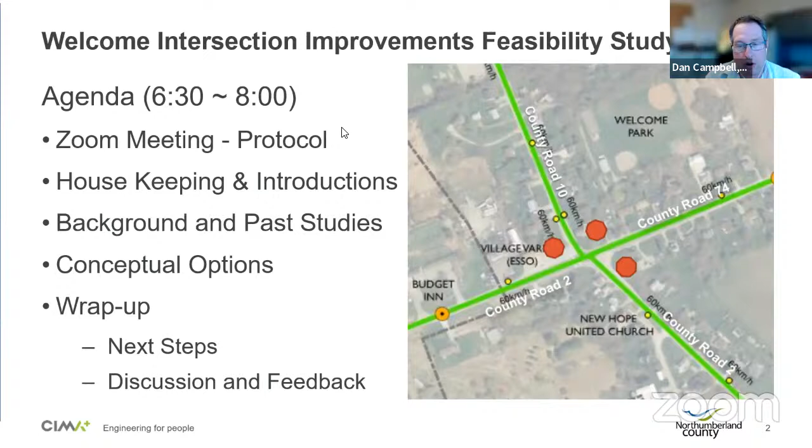So with that, we'll jump into the first portion of this evening, which is a presentation. As mentioned, the session's planned for 6:30 till 8 o'clock tonight. We've talked a little bit about the Zoom meeting protocols and some housekeeping already. I'll quickly roll into some introductions, then we'll move through background and past studies, discussion of the conceptual options, and then wrap up with some discussion of next steps and an opportunity for feedback. The presentation will probably take about half an hour to 40 minutes. We thank you for your time and patience, and hopefully there's some useful information along the way to help inform our conversation afterwards.

By way of introduction, on the call this evening there's myself, Dan Campbell. We have Denise Marshall, the Director of Public Works. I believe Brunilda Tenna, our project engineer working on this project, is also with us, along with some of our communications and corporate services team helping everything run smoothly. We also have Ron Albright from CIMA+. Ron is a project director with CIMA+ and has been the project manager for the work CIMA+ has done for the county on this project to help us develop and understand the various options.

Jumping right in, the project rationale - what's led us here. The intersection, as many people probably know, was originally part of MTO's road network, and it's evolved over the years, started as a two-way stop, became a three-way stop because of some of the sightline constraints to the east of the intersection along what used to be the old connecting link Highway 106, Dale Road now. That's what's led to that traffic control arrangement. There are also other challenges, including the grade coming up to the intersection from the west traveling eastbound, as well as the offset and skew between the south leg of County Road 2 and County Road 10, and a variety of other issues.

The size of the intersection is somewhat unique in that there are multiple lanes controlled by a stop sign, which is not typical, but not entirely uncommon.

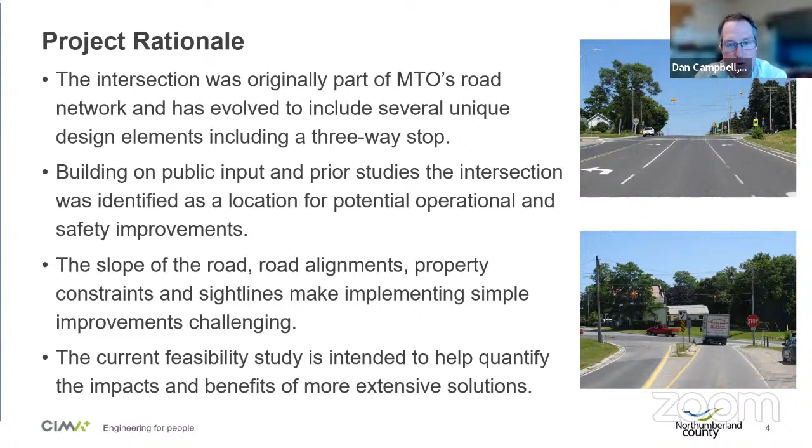So a bit of a recap of things we've probably already touched on, but the purpose of tonight's meeting is to share project background, present several possible options, outline what initially has been identified as the possible impacts and benefits of those options, and then receive feedback from those who have joined us tonight.

So the project process and timeline for the feasibility study we're in now: we've completed a background review and analysis, including listening to the comments and input we've received to date. We've developed some possible options, and we're here tonight as part of our public consultation process.

After we wrap this up, we'll incorporate the public feedback received tonight, as well as in the lead up to tonight, and use that to tweak and refine the options and how we understand their impacts.

Then we'll move forward in the summer to finalizing our feasibility study report. From there, we would look, pending budget approval and direction from council, to moving towards a detailed design for a preferred alternative.

Whatever that preferred alternative might be, construction would follow in 2024 or beyond, with all of that contingent on council approving the budget to move ahead with those activities.

Moving into a little more specific background, I want to touch on some of the previous public input the county has received over time, which has really come in three forms.

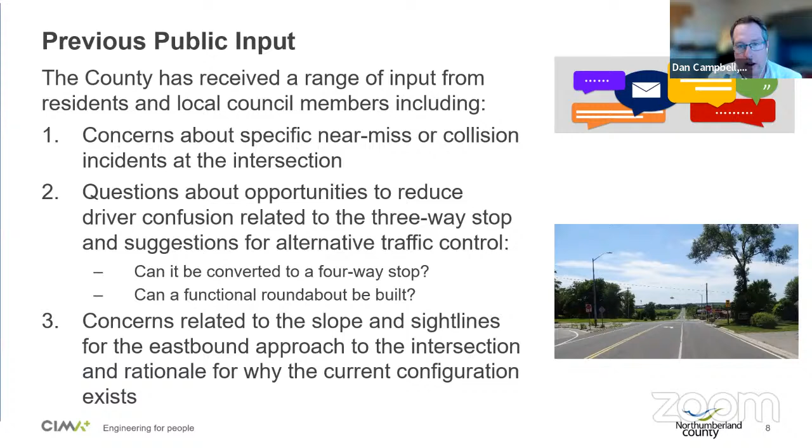It has led us to ask what we could feasibly do to possibly improve this, and that's why we're here tonight. Going back a little in time, in 2015 the county did a speed review in Welcome.

That review looked at collision history in Welcome. Between 2001 and 2014, there were 21 motor vehicle collisions of various nature within the Welcome area, on all of the roads leading into and through the hamlet.

Three of those collisions in that time period occurred at the intersection, or rather, three of those collisions were between 2010 and 2014, and one of them was at the intersection. All of those collisions were property damage only, fortunately.

Touching a little on speed from that study, the average operating speed was in the range of 70 to 77 kilometers an hour, with the 85th percentile speed...

85% of the traffic is doing at least 80 to 88 kilometers an hour, depending on where that was measured in the hamlet. So the study determined that the 60 kilometer an hour posted speed limit is appropriate, but driver compliance was found to be an issue.

There were recommendations for transition improvements to be implemented at the hamlet entry points to encourage compliance. That's been done and monitored, and the effectiveness of that is limited, something the county continues to monitor and work on solutions as we implement our speed management programs at various locations across the county.

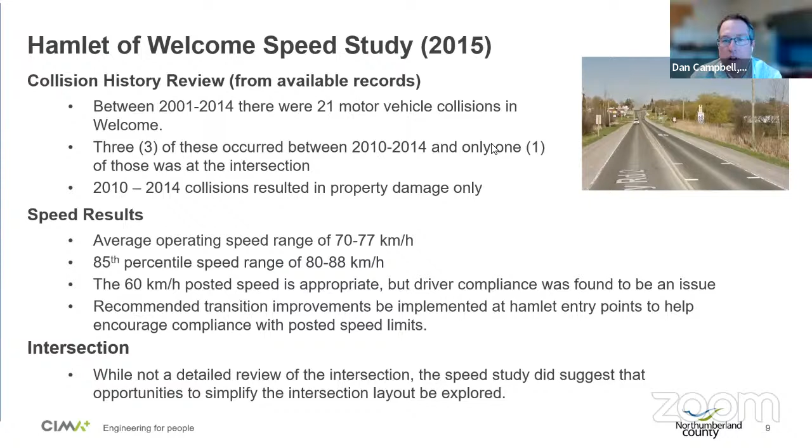Since 2015, the county, working with MTO and OPP to receive collision records, has continued to monitor collisions at and around the intersection. There have been 8 recorded collisions since 2015 up to 2020. 5 of those were within the intersection or on the stop controlled approaches to the intersection.

The 3 that are shown with the yellow dots were related to intersection operations and a failure of one vehicle to yield the right of way to another where required. So a function of how the traffic control is being obeyed or not obeyed.

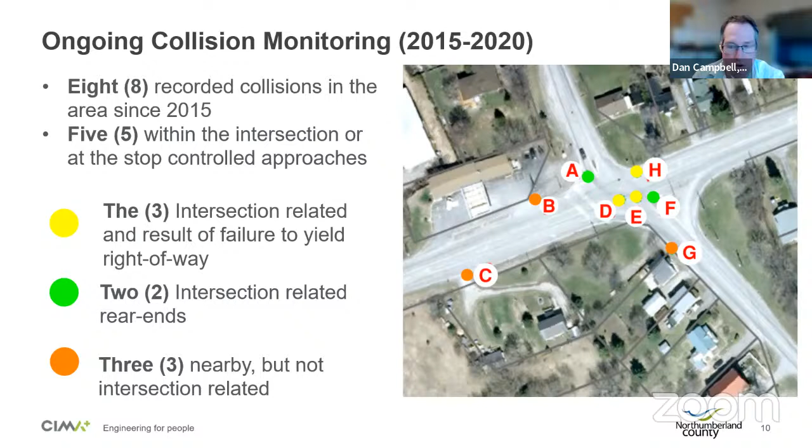2 of those, the green dots, were rear end incidents at the intersection where one vehicle stopped and another vehicle either failed to stop in time or just did not stop and ran into the rear end of the stopped vehicle. Then 3 that are around the intersection but were not related to the operation of the intersection itself. They're either single motor vehicle collisions or collisions involving an entrance to a driveway or commercial site.

Coming forward in time a little bit, in 2019 the county did an intersection conflict analysis. 1 week of video data was captured for the intersection, and the video was used to evaluate potential conflicts between traffic. The conflict analysis identifies situations where 2 vehicles come very close to occupying the same physical space at the exact same time.

In other words, basically a near miss. A collision didn't happen, but 2 vehicles came very close to colliding at the same point in time.

The diagram here illustrates the various movements at the intersection. A couple are removed for simplicity, but then the 7 different dots show individual conflict points between the various movements that were evaluated.

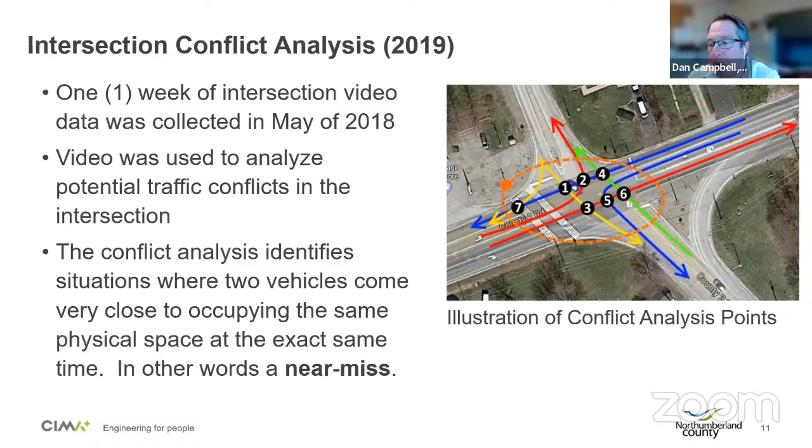Getting a little bit more technical, that analysis uses an approach called post-encroachment time, which looks at when one vehicle encroaches into the area that another vehicle has just left shortly before. The video data can be used to automatically identify vehicles and how far in space and time they were separated, and then allow that data to be digested and reviewed.

That 1 week of video data identified that there were no very high conflict PET values with less than 2 seconds observed. There were lots of moderate values of 3 to 5 seconds observed, and some high conflict values of 2 to 3 seconds.

When analyzing those values and combining them with the severity of a collision related to the potential conflict, the numerical data suggests that conflicts between the eastbound left turn crossing the westbound through movement and the eastbound through movement crossing the westbound left turn movement are potential risks, which I think probably comes as limited surprise to anybody.

That's the through movements with the left turn movements, one of those movements being the uncontrolled leg where traffic is not required to stop. The southbound right crossing the westbound through also cropped up because there's lots of vehicles that tend to accelerate quickly together through that section and be close together, although the severity of those potential collisions is lower than the others for sure.

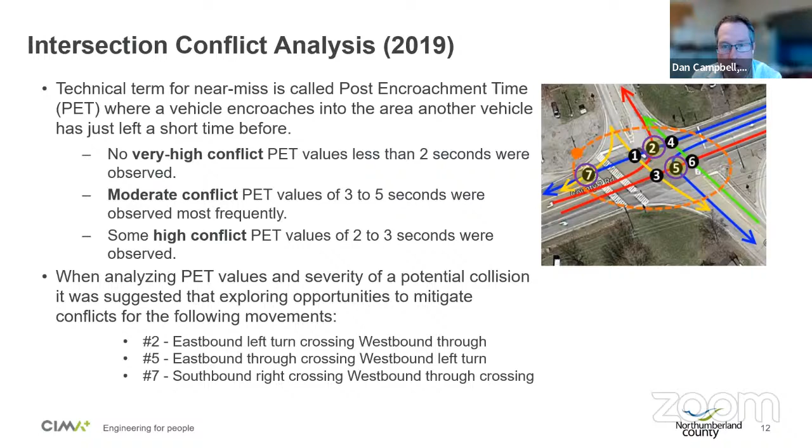So we're going to jump into conceptual options now. I'm just going to introduce some options, and then I'm going to turn it over to Ron to walk us through those options. We have 3 options we'd like to talk about tonight.

The first option is converting the intersection to a 4-way stop with full reconstruction of the intersection to create a flatter road profile to allow eastbound traffic to stop and restart. So we're going to talk about what that means and why it's necessary.

The second option is converting the intersection to a roundabout with related changes to road alignments and profiles. And we'll show a concept of how that could work, what the footprint of that is like in the community, and what some of the potential benefits and impacts of that are.

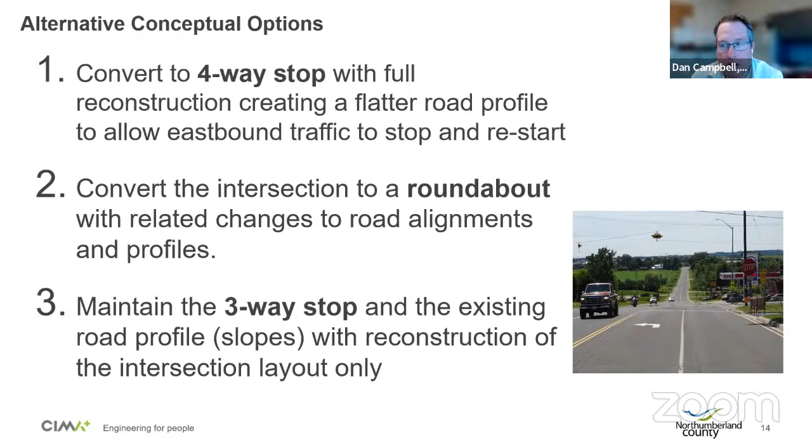And then finally, we'd like to also talk about an option where the three-way stop is maintained, the existing road profile of the slopes are maintained, and the intersection is reconstructed in its layout only, with just the lane configuration changed. To use an industry term, we put it on a road diet and squish the road in, reducing vehicular space, increasing space for other users, and simplifying the intersection to bring everything closer together. So with that, I'll turn it over to you, Ron. Thank you, Dan.

As part of our review, many design elements were considered when assessing the alternatives. First and foremost, safety for all users of the intersection, visibility for stopped vehicles, and being able to see left, right, and forward, making sure obstructions are not in these lines of sight.

The other sight line that is important to assess is being able to see oncoming vehicles when looking past a crest of a hill or looking through a vertical curve.

Potential property impacts as a result of design alternatives, operational impacts, or how users negotiate through the intersection, such as the time people are waiting to go through the intersection, the number of lanes required to provide an acceptable level of service for the intersection, and the steepness of the approaches. How changes will impact property owners accessing their property.

Impacts to such things as hydro lines, buried communications, gas lines, water mains, storm sewers. And finally, consideration beyond the vehicle, looking at impacts to other uses such as cyclists and pedestrians.

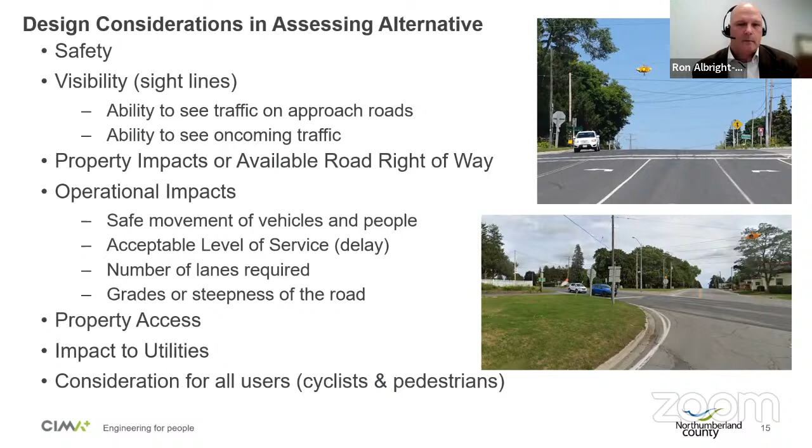Next slide, Dan. In order to assist the selection of options, CIMA+ reviewed the traffic data at the intersection to see how the intersection would operate under the changed conditions, namely reducing the intersection to have just a single lane approach in all directions, removing the left and right turn lanes. This would allow for a tighter intersection and flexibility in looking at design options. The result showed that the intersection would still operate at an acceptable level of service for the concepts considered, with all traffic control considerations.

Next slide, Dan. So the first option, being able to implement an all-way stop, requires some significant changes to the current configuration of the intersection. This option depicts the tightening of the intersection, showing the reduction in lanes, but the larger impact, in order to provide a suitable platform for vehicles to stop, namely in the eastbound direction or on the west leg of the intersection, requires significant flattening of the intersection, requiring some cut on the east part and fill on the west portion. As I noted, lanes were eliminated. There's no dedicated left turn lanes, channelized right turn lanes, or dedicated right turn lanes.

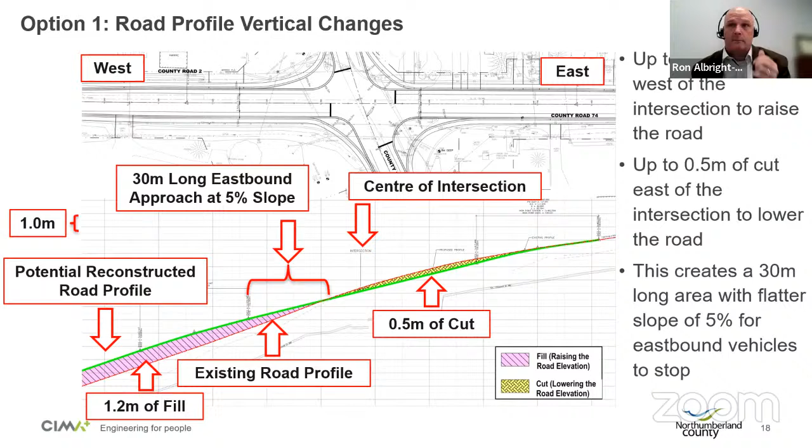So the benefits and impacts of the full reconstruction and all-way stop accommodation, or four-way stop accommodation. Again, a 30-meter platform to allow for vehicles to stop on a flattened platform, which is roughly 5%.

If you look at a normal road, the crossfall from center out to the edges is usually 2%. So this is roughly 2.5 times that. The existing slope on the west leg of the intersection is roughly 7.3%, so considerably more than 5%, but 5% is kind of the design standard for a stop condition.

The reconstruction would also provide better vertical sight lines through the intersection, so you can see oncoming traffic much better coming from the east or west. The reduced intersection size brings the stop vehicles much closer together and makes for better decision making, improving sight lines by pulling vehicles closer to the center of each crossroad. Some obstructions currently in the sight lines, on private property or in the right of way, are no longer as limited. There are still some, but they are greatly reduced. The other benefit with this option is the opportunity to accommodate cyclists through the intersection.

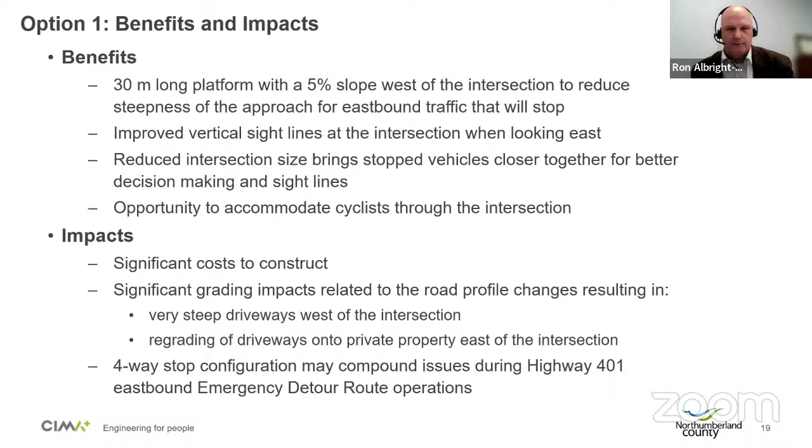Option 2, a roundabout. This option was not originally on the table, but after further review and discussion with our roundabout experts, we were able to physically fit it in, though there are significant impacts. The traffic control at a roundabout is yield, with right-of-way given to vehicles within the roundabout, and approaching vehicles must yield to those vehicles.

For this option, similar to option 1, significant regrading or reconstruction of the intersection would be required. The other large impact is a property requirement. With the other options considered, it can be fit within the current right-of-way, but this option would require the purchase of property to build a roundabout.

All lanes, with the exception of the southeast quadrant, are single lane approaches. There is a need for a channelized right turn as part of this roundabout configuration, due to the skew of the intersection and being able to get vehicles around that corner. So it's a little modified from a traditional roundabout, but due to the geometry, the additional right turn lane or channelization is required.

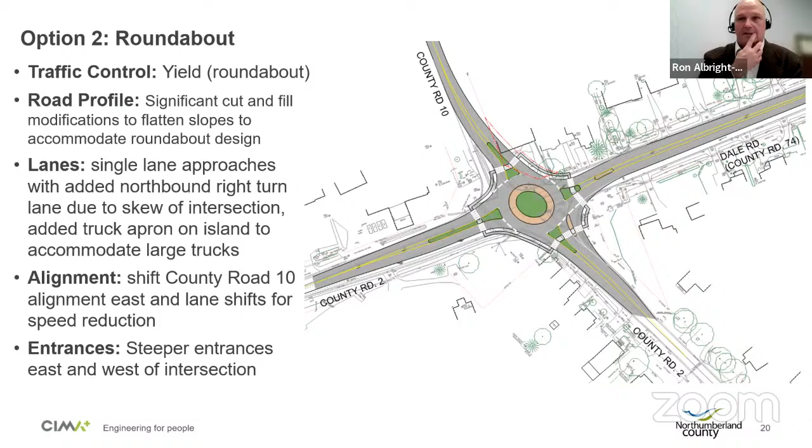This is just a blow-up, to give you a closer look at the elements, and the red outline in the top corner of the roundabout is the property that would be required to accommodate the roundabout.

Again, you can see sidewalk connections, and the approaches are controlled with a splitter island, which naturally reduces the speed on the approaches, which I will get into on the next slide. Thanks, Dan.

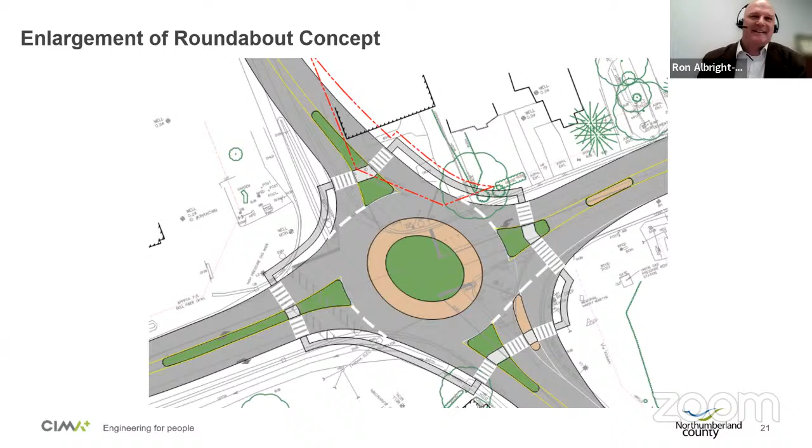Speed reduction at the intersection approaches. As I said, the design includes an offset approach that introduces basically a double curve, which naturally causes you to slow down and negotiate through the roundabout. If there are accidents within a roundabout, the severity is greatly reduced and typically it's just property damage.

The roundabout provides an opportunity for a gateway feature for either the county and/or the municipality of Port Hope, which, if you've been in other areas, many municipalities take advantage of by using the center of the roundabout for that purpose. And over the long term, there would be greater clarity and understanding for drivers, who would become familiar with the roundabout and be able to negotiate it just like any other intersection.

Impacts and disadvantages, as I noted earlier, there are significant property impacts, which would require the purchase of at least one full property and potentially some additional widenings in isolated locations. There are also significant grading impacts, similar to option 1, that would impact driveway access steepness and front yard tie-ins.

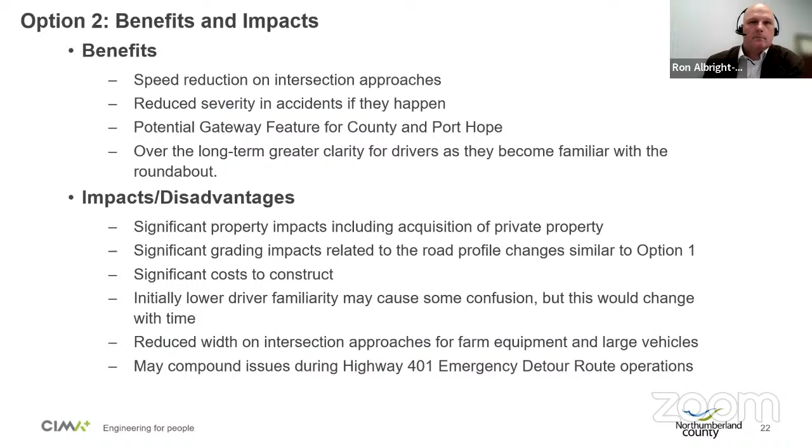Option 3 would essentially be a similar configuration to what is there now, with removal of the added left turn and right turn lanes that are currently at the intersection. The profile would match what is there now.

Curbs would be pulled in. They could be built within the existing asphalt and fit in. Repaving would most likely happen within the limits of the curb placement, just to provide potential crossfall correction.

Limited impacts to property - most of the work can fit within the existing asphalt footprint, and there'd be next to no changes to the existing access or driveways associated with this work.

The alignment shift for County Road 10 would be required, and as I've mentioned the entrances already, the other benefit with this option, similar to option 1, is there would be an accommodation for cyclists through the intersection.

One other thing we'd suggest to help improve clarity of the intersection is providing advanced notification as to how drivers are to negotiate through it, or more importantly how the other drivers at the intersection are going to operate, specifically highlighting that eastbound traffic does not stop. This is not a standard road sign, but it has been done in other locations.

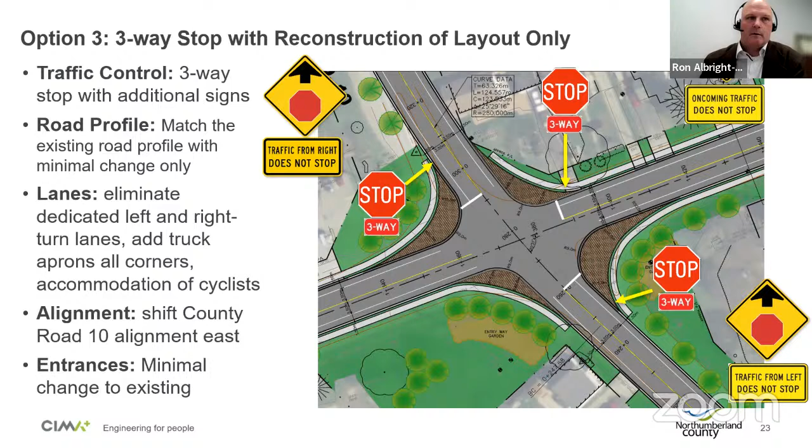Next slide, Dan. This is just a typical section of what the road might look like after reconstruction of option 3, showing the accommodation of cyclists. The thing to note here: the existing edge of pavement, noted by EX. EP, is well outside the limits of where the road will end up.

There's room for cycling lanes on the road, and a paved shoulder - a paved boulevard behind the curb - which could be used by pedestrians as well.

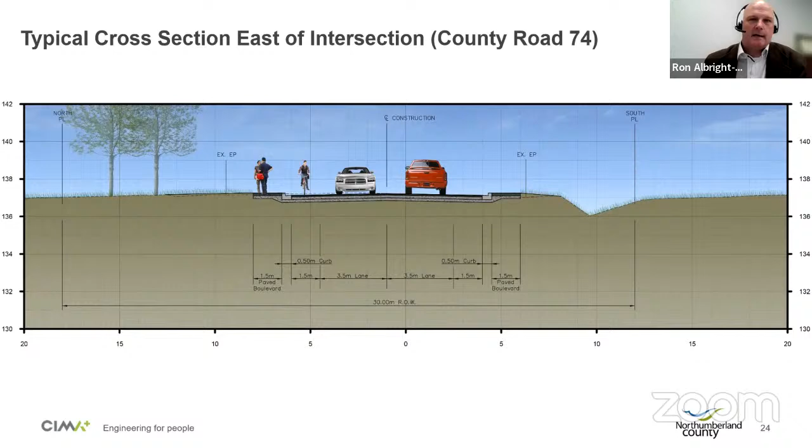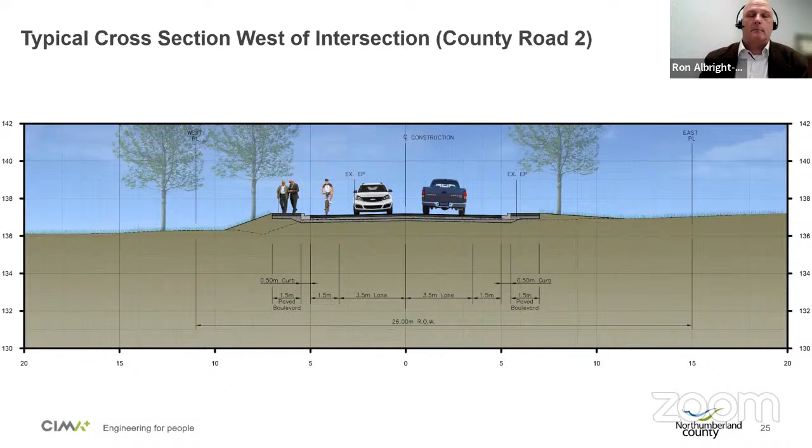Similar to the previous one, in this instance it is a little bit wider than the existing edge of pavement. This is further to the west, so there would be a slight widening, but it does not impact properties well within the right of way. Again, accommodation of cyclists and additional paved boulevard to accommodate pedestrians, and again single lanes in each direction.

Benefits: reduced intersection size brings stop conditions closer together for better decision making and sight lines, and eye contact with other drivers.

Accommodation of cyclists through the intersection, and minor to no grading impacts on private property. Disadvantages for this option: it does not address or improve the road slopes to allow for vehicles to stop on the west approach or eastbound approach. It does not improve the vertical profile of County Road 2, County Road 74, and the sight lines to the east will remain substandard. The three-way stop would remain, as a platform suitable for an all-way stop isn't provided.

So again, it would be similar to the current configuration, but much tighter, allowing drivers much more awareness of the other drivers at the intersection. And I did mention that confusion at the intersection could be improved with advance signage.

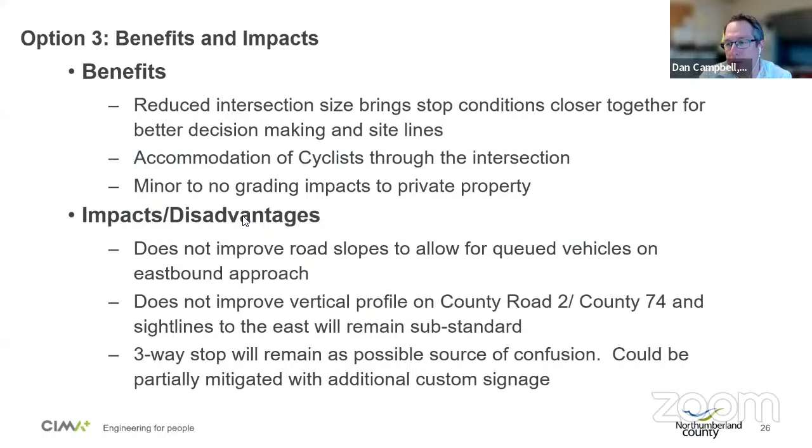One other thing we've considered is on the western approach, the eastbound approach - there are pavement markings associated with the crosswalk that was there previously, which had crossing guard supervision when George Hamilton Public School was still open. With that crosswalk no longer being supervised and not on a stop controlled approach, we would consider removing those pavement markings in the short term to make it more transparent to eastbound drivers that they're not stopping, and similarly more transparent to drivers on the other legs that there's nothing resembling a stop bar or crosswalk typically associated with a stop condition on that leg. Those are some short-term things in the less than 1 year timeline that we've considered possibly doing.

Previously, the county had implemented some pictorial 3-way stop signage at the stop signs, just to give drivers a graphical sense of what they could expect from the other approaches. Now, again, that's non-standard signage, so not everybody understands quickly and easily how to interpret that. That was one, I believe, adapted from something implemented in a few locations in Saskatchewan, so it's not a common one here in Ontario.

So we may look to try to implement some other alternatives similar to what we showed tonight to bolster that, or take a different approach and use words rather than pictures, I guess.